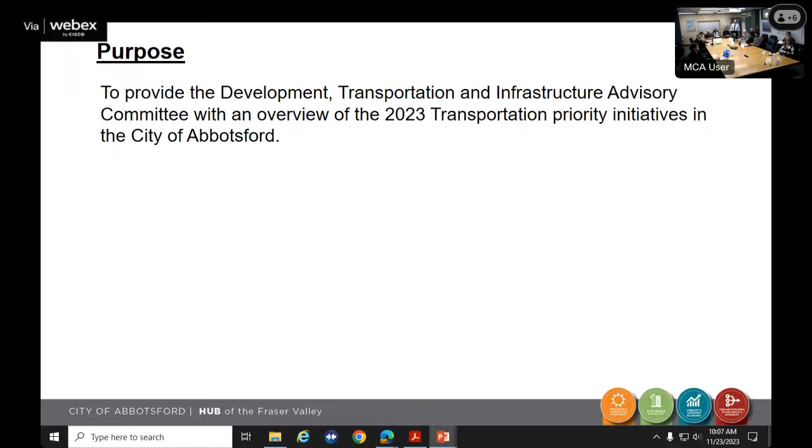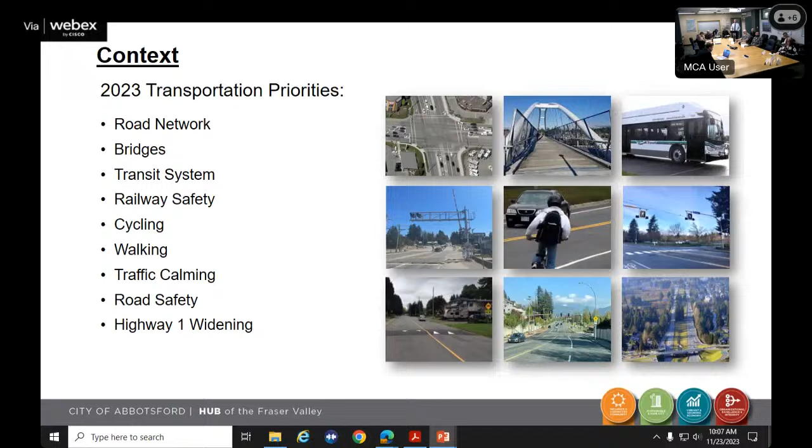So with that, our agenda will walk through these points, and the purpose is to provide the committee with an overview of the 2023 priority initiatives for the city. We are going to get into these 9 topics: our road network, our bridges, our transit system, railway safety, cycling, walking, traffic calming, road safety, and the all-important Highway 1 widening that's coming.

So starting with our asphalt rehab program, it begins with road quality data collection. We have a vehicle that drives all of our roads and produces a worst to first condition rating of our roads. We then coordinate with our utilities department, our underground water, sewer, and drainage, and also our third-party utilities, Fortis and BC Hydro, to make sure we're coordinating the surface rehab with the underground works.

Sometimes the road quality has been reduced so much that the road must be resurfaced, so we coordinate underground works to happen first. Other times the road can be in okay shape, but an underground utility is at the end of its life and we have to do a project on it. So most of these are driven by that data collection on the worst to first list, but some are informed by the underground works that have to go first.

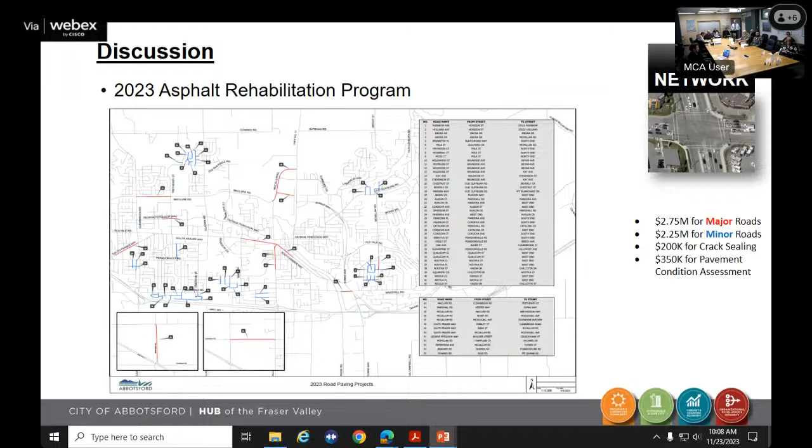Another example of a road in town that I feel is noteworthy for this committee is the Marshall Road corridor project between McMillan and Timberlane. It's an example of an urban road that was being underutilized and not meeting the demand or the need of the residents that travel it. It was only serving really vehicles for travel and parking.

This is just a snippet of one component of the project at an intersection where you can get an understanding of what a complete street really means. It's an insight into future work where Marshall Road was quite wide and we had a lot of need to serve cyclists, pedestrians, transit, parking, and travel. Where it was only really serving 2 of those, we now have an ability to put in improved infrastructure that serves 5 different modes on that same road right-of-way. That's an example of work that's underway right now.

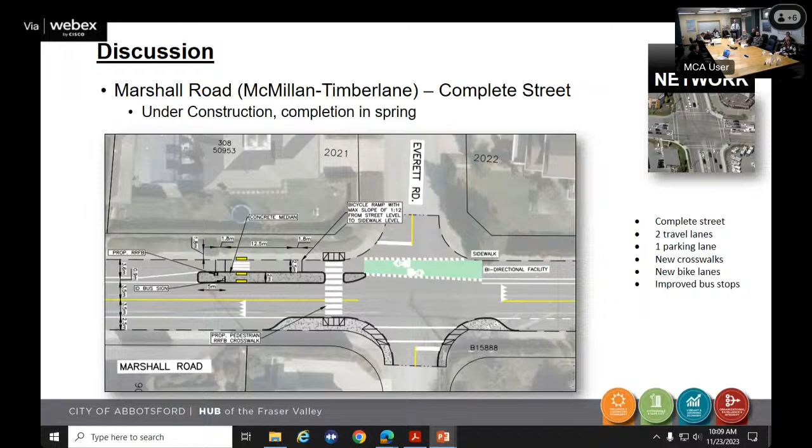Construction is about to begin here at this intersection. There'll be some significant earthworks and retaining wall geotechnical work done here to provide the footprint for this new intersection, which will have left turn lanes, improved lighting, new crosswalks, and it will help with the flow, efficiency, and safety at this intersection.

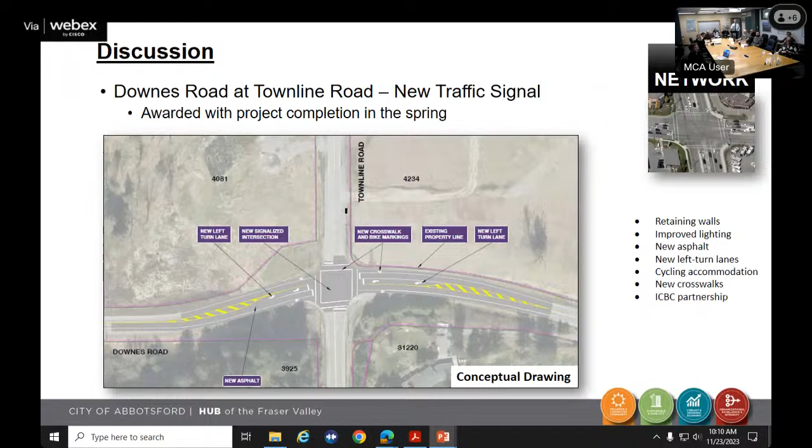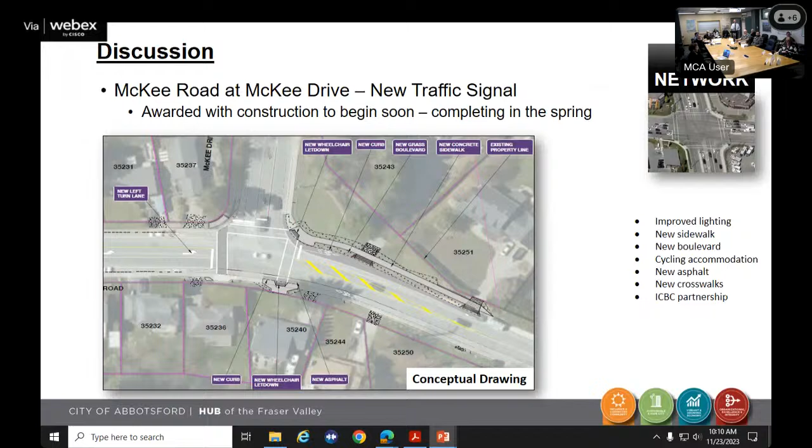Similarly, work is underway at the moment at McKee and McKee, with improved lighting, new sidewalk, boulevard, cycling accommodation, crosswalks, sidewalks, boulevards, all of our current engineering standards going on to help with the flow there.

And tendering this month is an emergency signal for our fire hall number 1. So when a call for service happens and our crews jump into whichever vehicle apparatus they need, we'll stop traffic on the 4-lane arterial road of George Ferguson while they leave, which will help improve their response time and safety.

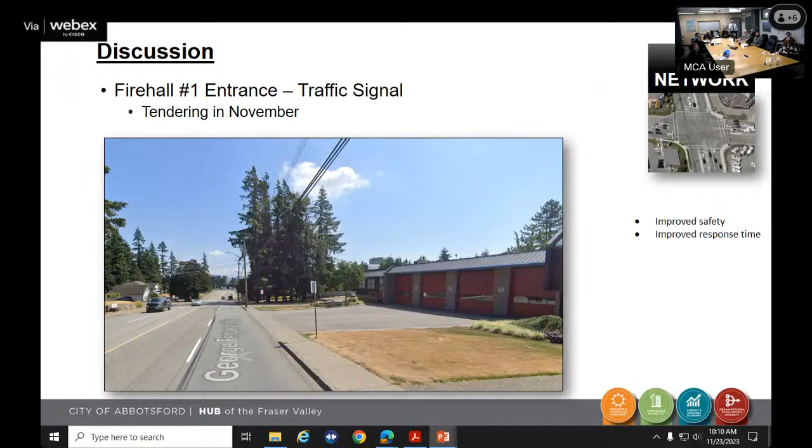Some existing signals that we are upgrading over on Townline at Firhill and Ridgeview. It's underway right now. We are better aligning this intersection.

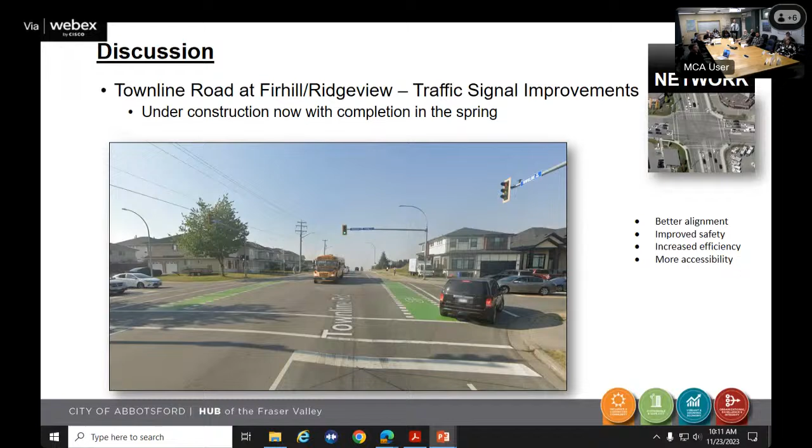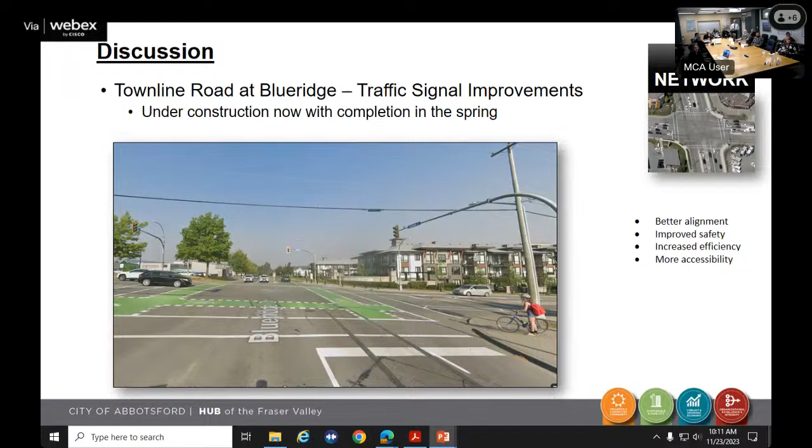We have added dedicated left turn lanes and matching the signal to that, improving the lighting and making accessibility better. Same over on the same road, just further up at Blueridge. Just giving you a snapshot there. So this vehicle happens to be positioned in the left turn lane, and the signal in the background doesn't have the advanced green arrow.

So we are adding that, and that just helps with the flow, efficiency, and safety at that intersection. I'm not sure how many people have been out on the Fraser Highway lately, but you'll see that we are essentially substantially complete. There's a little bit of cleanup work still to remain to be done, but we have expanded capacity. We've added, as this picture indicates, some improved bike lanes, some improved turn capacity for right turns and left turns. This is at Ross. Every intersection is slightly different to meet its needs. This is phase 1 of future phases that will continue this, but for right now we have improved the capacity, efficiency, and lighting of the corridor.

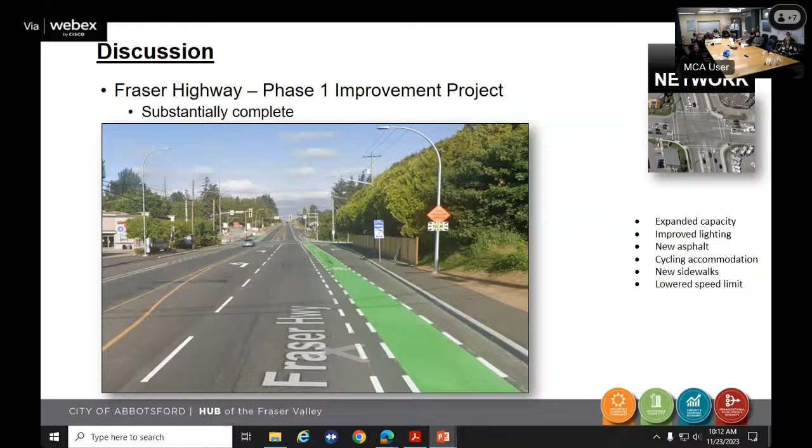Marshall Road will be opening at the end of this year, very soon. This was important, I think everybody understood previously from this announced project the importance of it connecting to our industrial area to the 16th Avenue corridor. This is going to take pressure off of Fraser Highway, off of Highway 1. It's a very important connection, and it will be opening soon, and we're very fortunate that that's going to be the case.

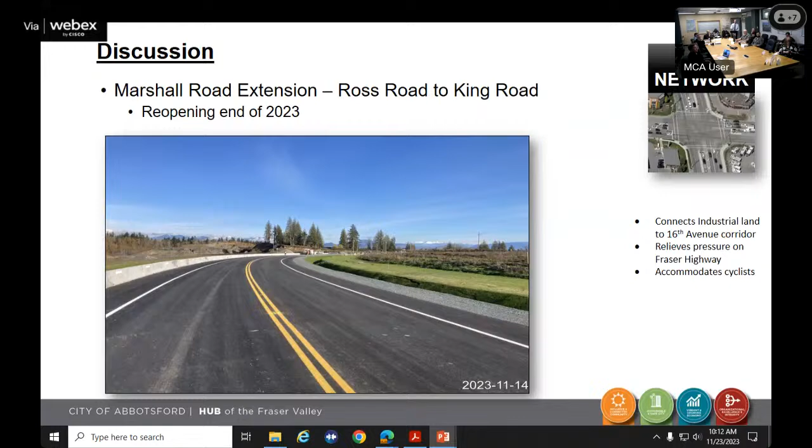Another one, everyone's aware of this. I won't get in front of our mayor and council announcing when this is opening. It's opening very soon. This one is connected to the Nexus Lane and the Highway 1 border crossing project that we partnered with the Ministry of Transportation and the railway companies on. Grade separation is the key here on this overpass. In the distance, you see the roundabout at Riverside. It accommodates pedestrians and cyclists, and it is a much needed efficiency improvement in that area. I think everybody from the city understands that, so we're all looking forward to this opening up very, very soon.

Oh sorry, one last note, the last bullet there, it also serves for a bigger purpose of the extraordinary height and width loads that come through Abbotsford, passing through our community. Without this being open, the previous detour route was very awkward, so this makes a more efficient route for vehicles coming from the lower mainland that need to travel to points eastward and vice versa. This relieves them from having to detour way south to 4th Avenue, potentially get caught up in border issues, railway crossings, and is more streamlined. So the province, one of the reasons why they partnered with us on this one, was also to get an improved extraordinary load width route for them.

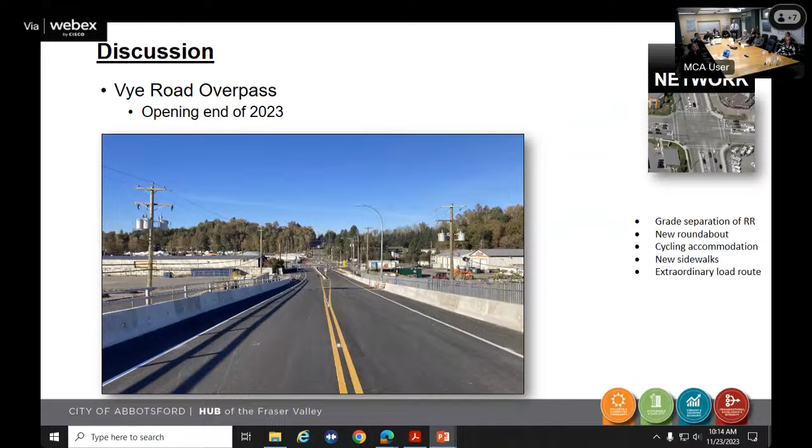Over to the bridge program. So we have 52 structures, bridges, in Abbotsford. They get inspected every 3 years. They have annual bridge maintenance on them. Sometimes there's larger issues at play, so we have an annual bridge betterment program that addresses those. That can include replacements of end-of-life structures.

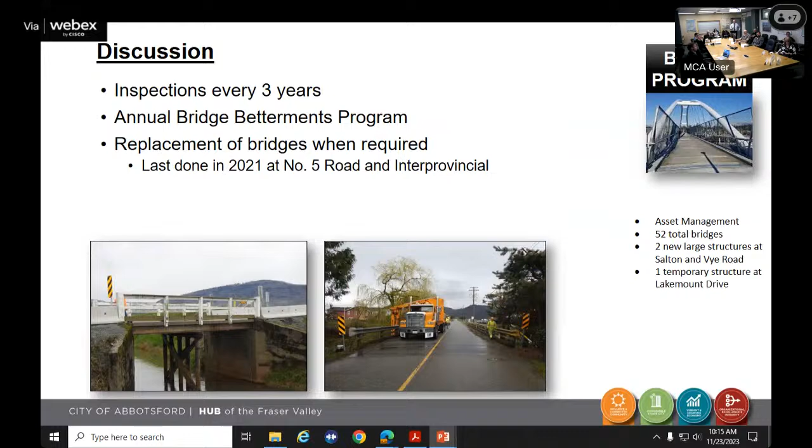Our last one was just done in 2021 at the floods out in Sumas Prairie. And yeah, our structures now, as we grow as a city, used to be more representative in the picture in the bottom left there, but we are now starting to get the larger structures that a bigger city gets, like Salton Road for the pedestrian or the new Vye Road. So we are growing there.

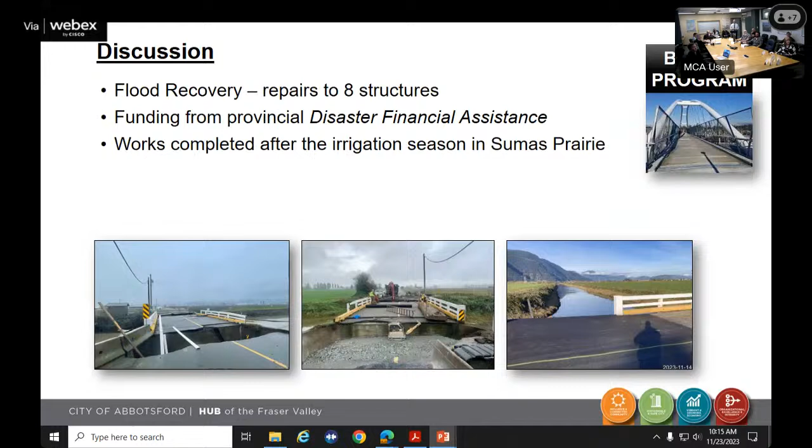Just a note too, though, about the flood recovery. In my capacity in the last couple of years, I've been helping out in this area. So the bridge program that would normally be done by transportation, some of the structures were damaged and have been repaired by the flood recovery through the province. So getting some provincial financial aid for them, and just a couple of representative photos of Number 4 Road as an example.

One bridge, I'm not sure if people have been out to Barrowtown lately, but the old Highway 1 bridge, just south of Barrowtown, came to the end of its life. It was devolved to us from the province, with some funding for removal. So the old bridge had, I don't want to be wrong here, I think about 90 of those creosote soaked wood pilings. So not just environmentally improved now, but that old structure was at the end of its life, and that has recently been removed.

Some final remediation works are to take place there in the bottom right, but you could sort of see before, during, and after there.

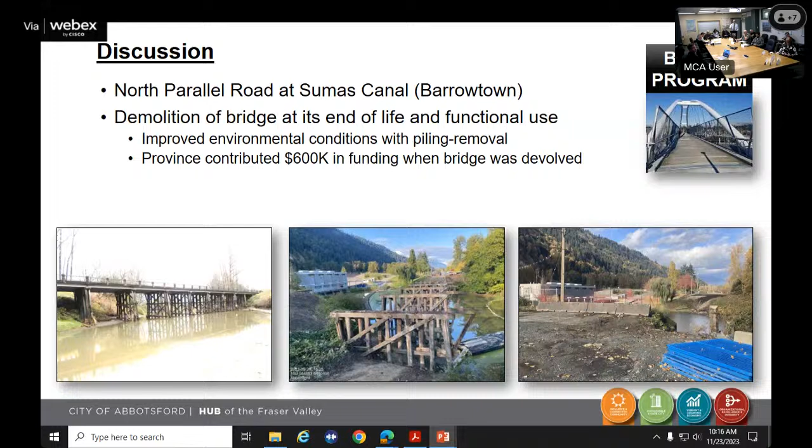And that sort of concludes the bridge part. So over to transit. This year, predominantly, I'll remember it for two things.

One was the 5-month strike from the operating company with their unionized workers. They resolved it, which is nice. The second thing I'll remember this year with Transit is that we've hit an all-time high in Abbotsford.

Our transit ridership has never been higher. We were previously proud to report back in 2019 our highest ever, and then the COVID years happened where everything changed in transportation. People were working from home, nobody wanted to be out in public. Our transit ridership dropped by 80% from what was our previous high, and the big question was, would it ever come back? Were we ever going to see high ridership on public transportation again?

And we have just absolutely punched through that thinking into 122% of what our previous high was. So that really tells us a few things, that we are starting to grow as a city, grow in our urban areas, on our frequent transit network, starting to see capacity bus routes. So now it's on us with our planners at BC Transit to really target expansions for the future in the right way, aligning those expansions with development.

So we have presented previously to council our expansion plans for the future. It's going to start with actually a HandyDART expansion next year.

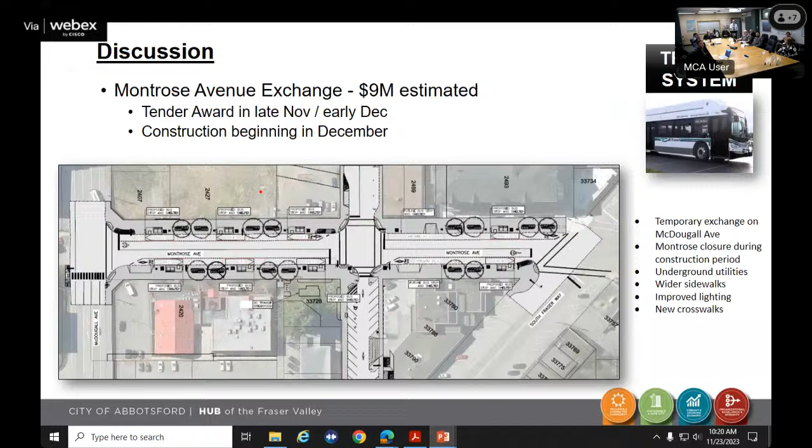And we have CN that runs along west or east to west along the banks of the Fraser and heads into the city that way. So those CN and CP are federally regulated, and all railways fall under the sort of safety and regulation set forth by Transport Canada.

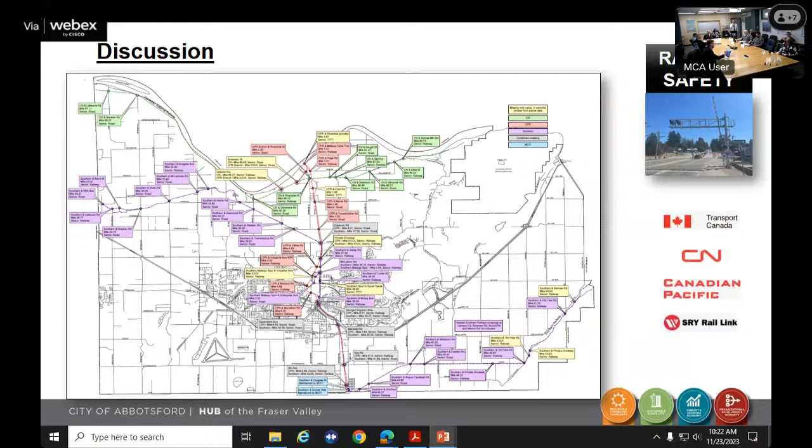So there's engineering work. Each one of those boxes is representative of staff here from the City of Abbotsford working with the rail companies under Transport Canada at each one of those bullet points. The things you see there, the signage, the road markings, sometimes gate arms, that's all representative of railway safety work that we do here.

Sorry, go ahead. There's one missing. On page 23, it would be just west of Bowman Road. There is another private driveway. Private driveways - if we want to get into the weeds, I love that you went into the weeds - there's actually a few more private driveways that, believe it or not, made the slide almost unreadable. Some of the private drives actually aren't on there, and I'm thinking one's closer to Majuba Hill. Yeah, there's a couple on here. So how do some make the cut and some don't?

This is an internal sort of document that could have been identified either by us or by the railway companies. It wasn't supposed to be an exhaustive list, but it's supposed to be representative. I did note a couple that I'm aware of on Majuba Hill, and it's quite possible there's a couple that aren't shown on there as well. I bet if we looked closer out in the Matsqui Prairie, on roads near Bell and Beharrell and such, there's a few more farmer crossings out there that haven't been identified. It wasn't meant to show everyone, but these show the level of work that's been done by our staff this year.

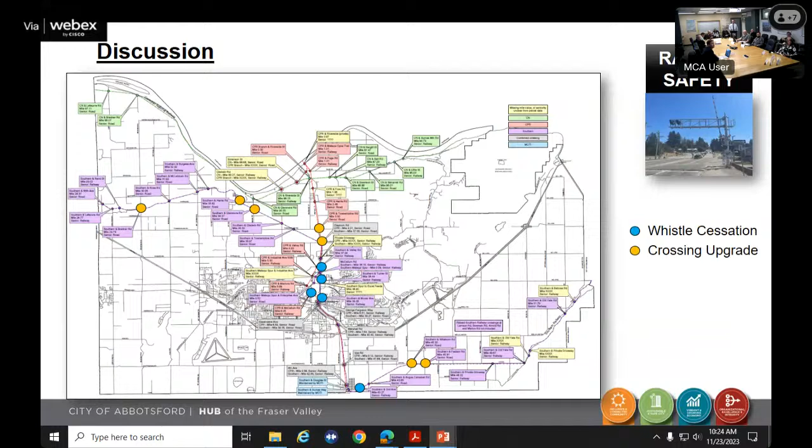Thank you. No worries.

Over on the cycling program, one that we're currently working on that we've got a tender coming for early next year is Sumas to Delair. I've just taken this snippet to give a representative look at what it is. It's defined as a bikeway, but it does more than that, and many of our projects are like that. It's given a title, but what we actually do is, in this case, certainly construct a bike lane, but its connectivity with the adjacent road network means we're changing alignment of roads, adding boulevards, lighting, crosswalks, and driveway connections. So there's more going on than just a cycling program, but the ultimate end product will be cycling infrastructure connecting Highway 11, or Sumas Way as we know it, over to Delair Park at Yale Road.

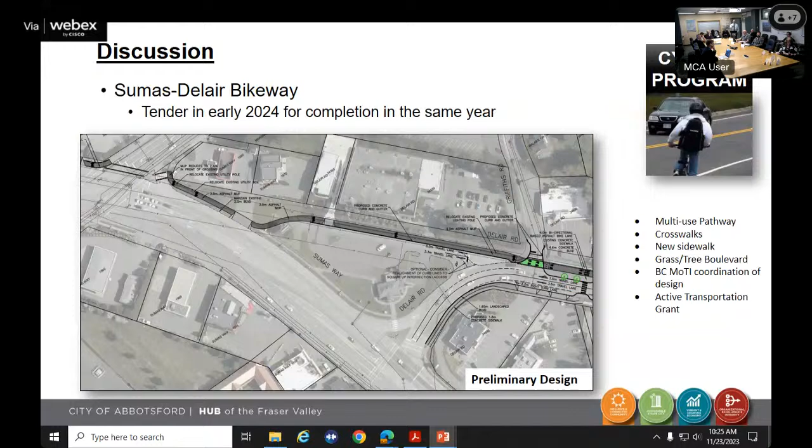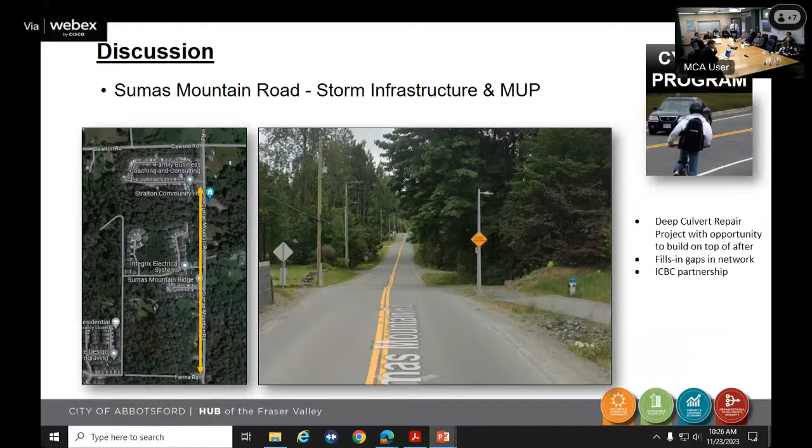In town, we have a sidewalk connection where development left off, and there is a gap between that development down to Marshall, which connects down towards the hospital and fills in a gap in an urban area.

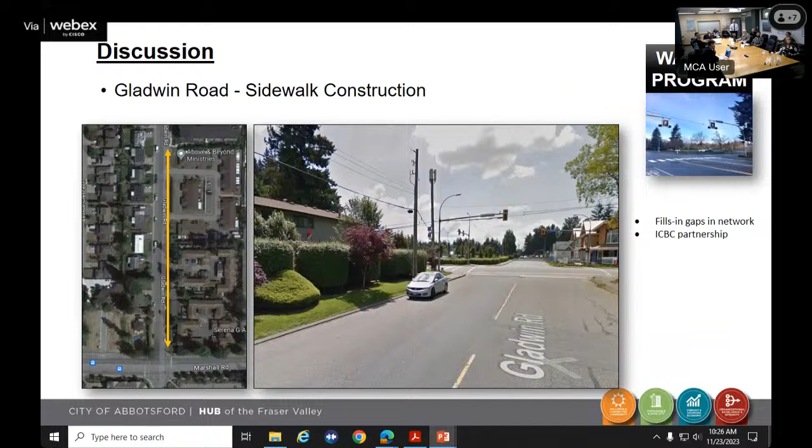And that's where we are.

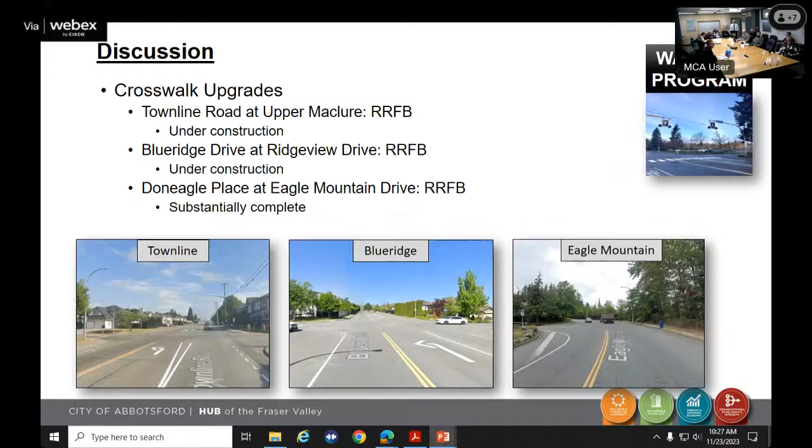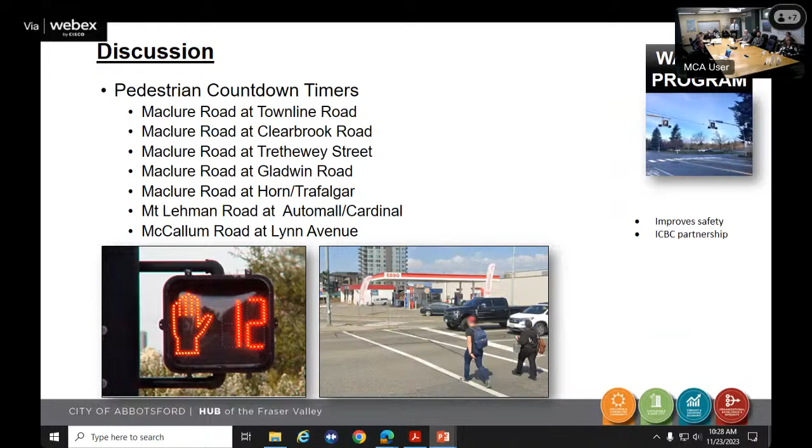You'll see just by the nature of the roads we're targeting, we're going for urban arterial roads, and we do this every year, usually anywhere from 6 to 8 a year.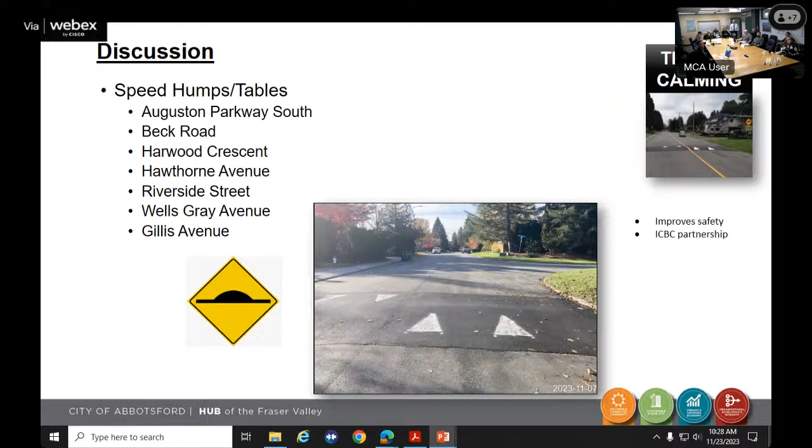We're spending more time here. I believe there had been a delegation to this committee in the past about issues along Maclure. We have been doing asphalt rehab programs and, at various points along Maclure, we've reduced the speed. We are spending time and effort on Maclure, and we will continue to do so because we know how important that road is in our community. So this is just one more component of Maclure that we're working on.

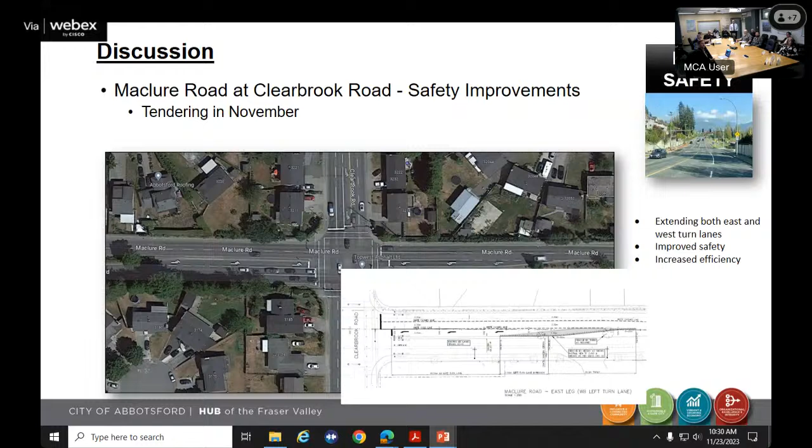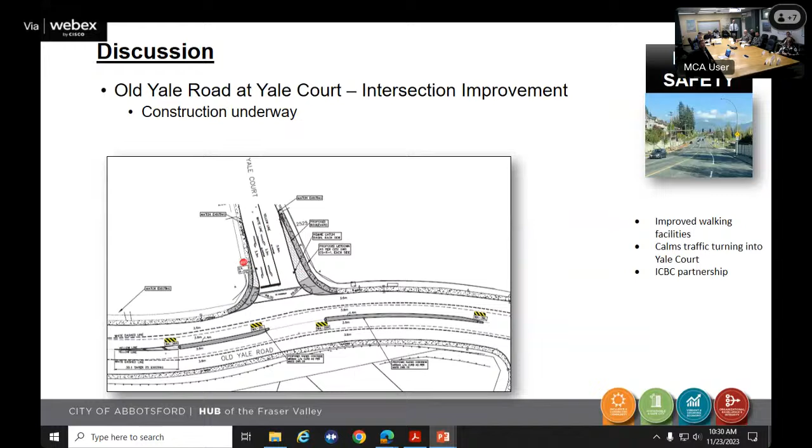Another road safety project, I believe it came to the TAC committee, the precursor to this committee, was issues at this intersection. So this is us getting to the construction of it, to help safety at this intersection. The speeding was the central issue along Old Yale Road, and that made it difficult turning in and out of Yale Court at Old Yale Road. So we have taken the opportunity to also address some walking challenges there as well.

One more component of road safety is power outages. We have something called UPS, uninterruptible power supply. Essentially, when we have a power failure, the traffic signals will continue without interruption, they have battery packs and will continue for, depending on the type of signal and how much is going on and how much battery power is needed, 5 to 12 hours of battery life. That usually gives the power company enough time to restore power without the traffic lights also being dark.

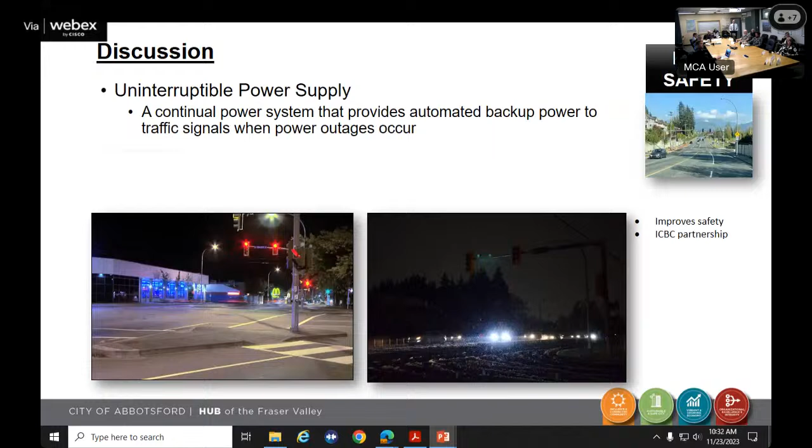The four-way stop procedure is the ultimate end result if even the uninterruptible power supply, after 12 hours at an urban intersection, becomes a challenge for the battery packs to keep going. The picture on the right is what you get, and that's a challenge. So we are trying to back up our signals with battery packs, and we do that every year as well.

We tried a very brilliant yellow neon school stencil across the road. ICBC was generous and paid for the product, and we just covered our time for traffic control and putting it down. We are going to monitor its effectiveness and how durable it is. Can it handle winter operations? Does it still look okay after a year or two? Then we'll decide where it goes from there, and we want to hear from the schools as well, whether they felt it did its intended job or not. So we just tried 2 rural elementary schools, and we'll see from where it goes from here.

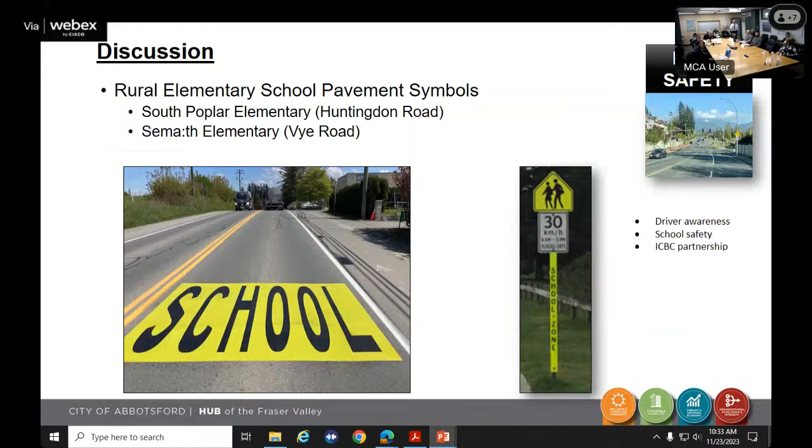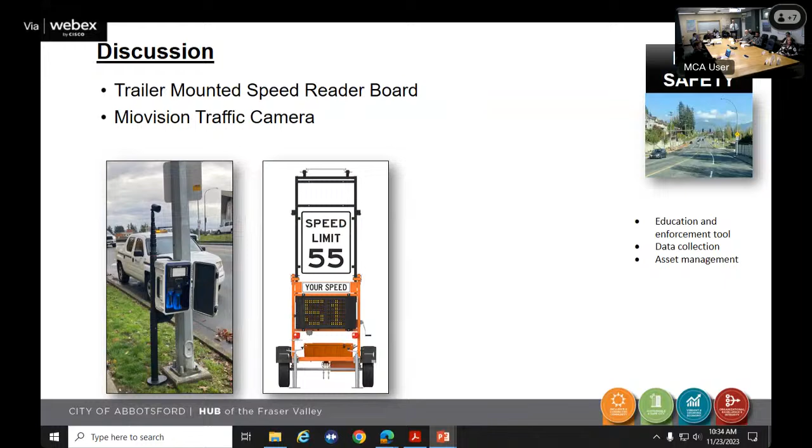And the other one is for our work with the Abbotsford Police Department. We have a mobile speed trailer that members will be able to hook up to their vehicles and take out to a scene in a neighborhood where we've had issues. So it just allows us to be a little more reactive and responsive to the public that asks for help, and we don't have a fast way to respond with like a major program. We can just go out right away with one of these units.

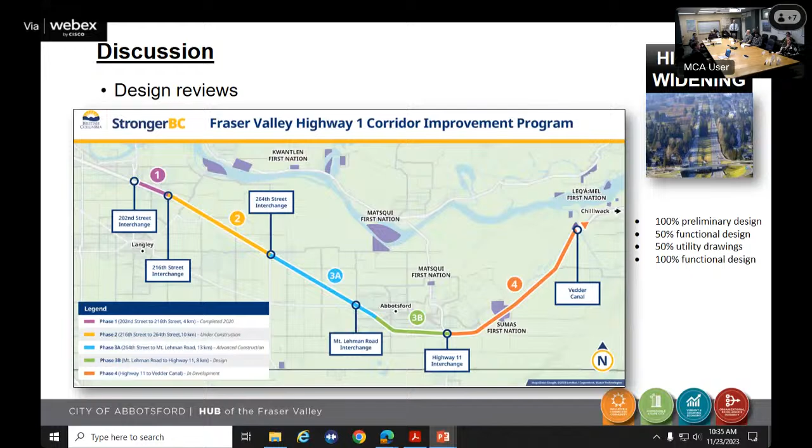We're just saying that, as an example, the last drawing review, they gave us 409 pages of designs for that. So it's representative of the time and level of effort to build what is going to be a very expensive project through our city, very important to our city too. So there's a level of effort there.

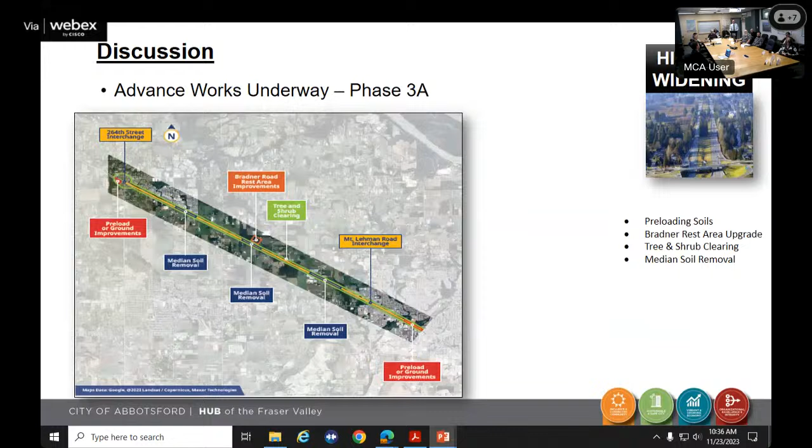So with that, there are some advanced works that are actually underway. We've got on this slide, it shows that there's a lot of soils in the median that are being removed, and preloading of soils that are going to go underway. They've got tree and shrub clearing and removal, and these works are underway. Contracts have been awarded. I've been at 3 different pre-cons for 3 different segments of the highway with contractors. So they know how they're going to get in and get out, and it's going to take them a good year to get in. And there's a lot of material in the median there to be removed and preloaded.

I hope that pacing was okay. That's a lot, you know, and I do want to be clear, these were tangible projects that if you drive around the community, you can see. It wasn't meant to be a rundown of everything that we do as staff.

For the development community, you should know that every development that comes through our city, be it a 2-lot split to a big development, is reviewed by staff, and every special event - every parade, Christmas lighting, Remembrance Day, Canada Day, Sikh Parade - that all takes staff time to work with the organizers and the police on those types of works. There's every permit, every contractor that goes out to work on the roadway, our staff make sure those traffic controls are safe and proper. So it wasn't meant to be a rundown of everything we do.

We do a lot of planning work as well too on future areas. I know reports have been brought to this committee before for the McKee Peak and other planning areas, so a lot of staff time is also spent on that as well. But we thought there was a bit of a gap that we wanted to address to this committee for that actual work that you would see as you drive around the community. And we were hoping this presentation would sort of give a rundown of what you're seeing in your own city. But I'm here for any further questions.

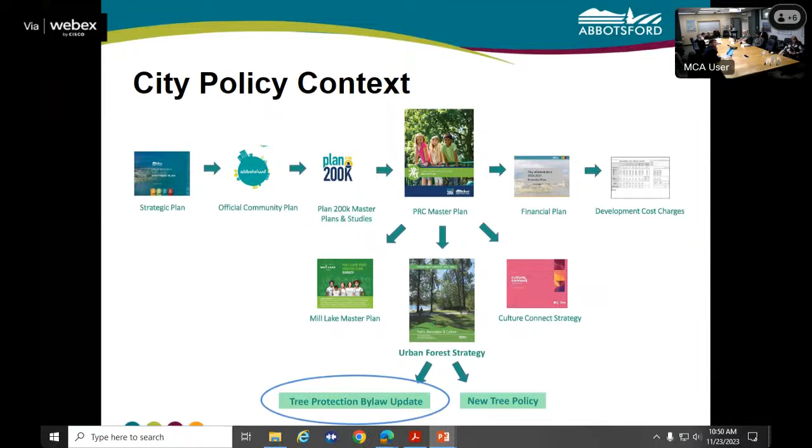As was also mentioned, the tree bylaw responds to a lot of actions from the strategy that I'll provide more information on. Alongside that, there are plans to create a new city tree policy focused on city management of trees that will be coming later. The Urban Forest Strategy was adopted in 2022 and provides a lot of direction specific to updates related to the tree protection bylaw. Also worth noting, Abbotsford's current bylaw is somewhat dated, adopted in 2010, and at this stage the city judges that it lacks the outlook necessary to effectively manage the urban forest.

Now, when it comes to tree regulations, tree protection or tree management bylaws are always the first thing that come to mind, and certainly they are an important tool for how we manage our trees. But before we dig into that, I wanted to spend a moment acknowledging how it fits into the broader spectrum of tools and regulations that have an impact on trees in the city.

There are really three categories we like to speak to when it comes to tree management. The first is higher level tools such as your Official Community Plan and the Urban Forest Strategy, which are there to set direction and policies that guide the intent behind how we manage the urban forest. Another important set of tools relates to land use.

Zoning bylaws will take precedent over a tree bylaw to ensure that people are allowed to build to permitted use. Therefore, what zoning allows in terms of site coverage, for example, will have big impacts on how many trees we are able to retain and or plant in the future. That's also an important consideration when the city thinks about how trees are managed as a whole.

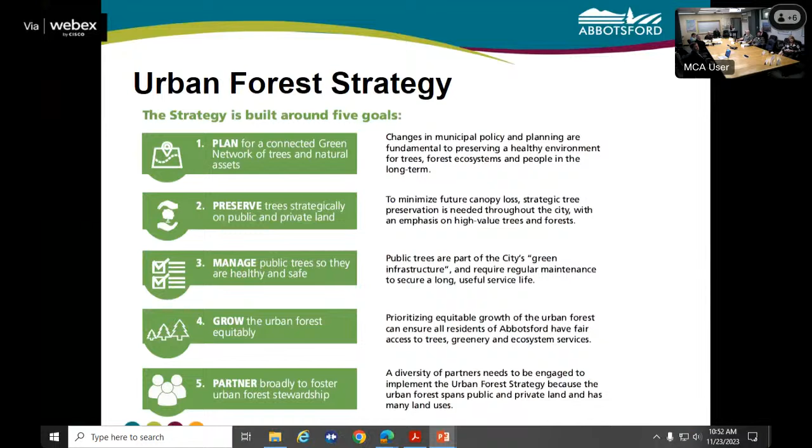Without going into too many details, I wanted to acknowledge that as part of those higher level guidance documents, the Urban Forest Strategy is built around five broad goals under which a number of actions sit. As a whole, that document includes 55 action items, of which we have six that are directly or indirectly related to some of the options we'll be discussing today.

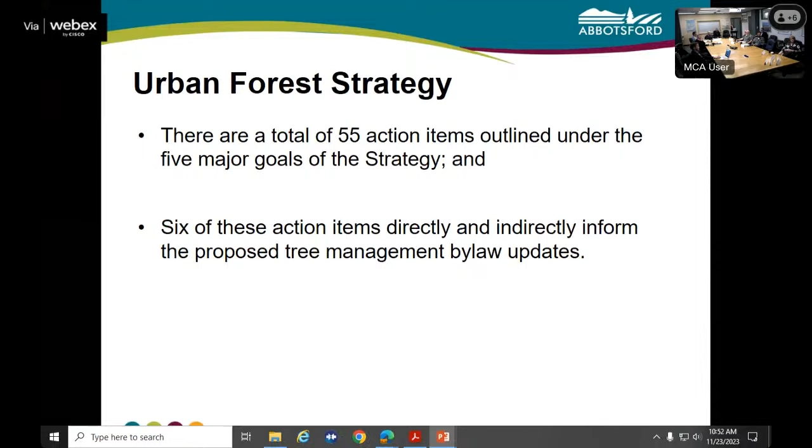So when it comes to tree-specific guidance within the strategy, there are a few actions you'll see here. Action 4 is focused on updating the recommended tree species list, with a few things in mind, including making sure the species we're planting will be suitable in our changing climate. Action 10 is focused on updating the tree bylaw to align it with the strategy's targets to strengthen tree protection and replacement, including within those development permit areas, and I'll be getting back to that.

The third action you see here is focused on creating a nomination process for significant trees, which would serve to populate what is now an empty schedule within the tree bylaw.

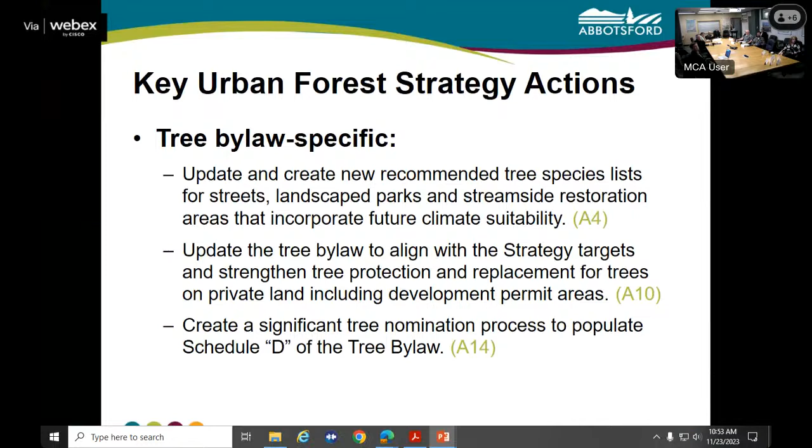More generally relevant, of course, is the tree canopy cover target included in the plan, which is 40% citywide, with no neighborhoods less than 20% in canopy cover over time. There's also an action focused on increasing tree cover in neighborhoods that have fewer trees, so less than 20% canopy.

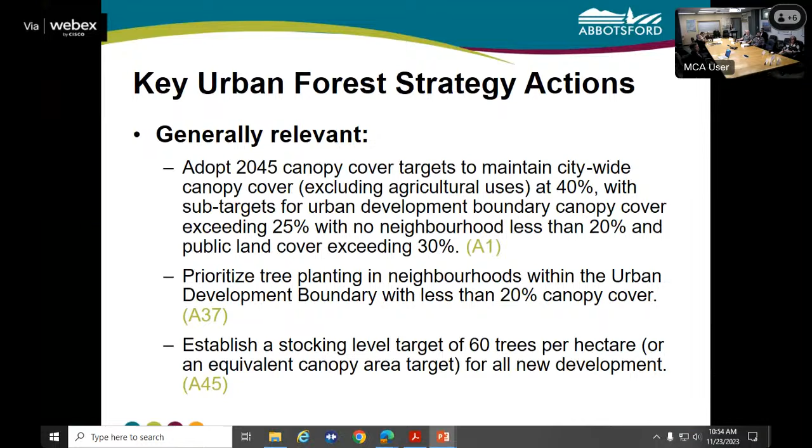This is an angle that's important for us to consider when we're looking at updating your tree bylaw. The last one I'll mention is a recommendation to establish a stocking level target, or tree density target, of 60 trees per hectare for all new developments. This is also connected to that 40% canopy cover target I just mentioned, with essentially the intent to equalize canopy cover, increasing it in neighborhoods that have less canopy over time through development.

More specifically though, what does 40% canopy look like?

The reason why I'm mentioning those two numbers, 40% canopy as a citywide goal and 60 trees per hectare for new development, is because they're fairly closely related. When planting trees that will grow a medium to large canopy at maturity, we estimate it would take about 60 trees per hectare to achieve 40% once those trees have matured. So if we are aiming for 60 trees per hectare on new development, that would allow us to achieve that target over time.

It's worth noting that this would require more trees if we're planting smaller species such as cherry trees. But generally speaking, that's why you're seeing those two numbers, which I'll be referring to a few times through the presentation.

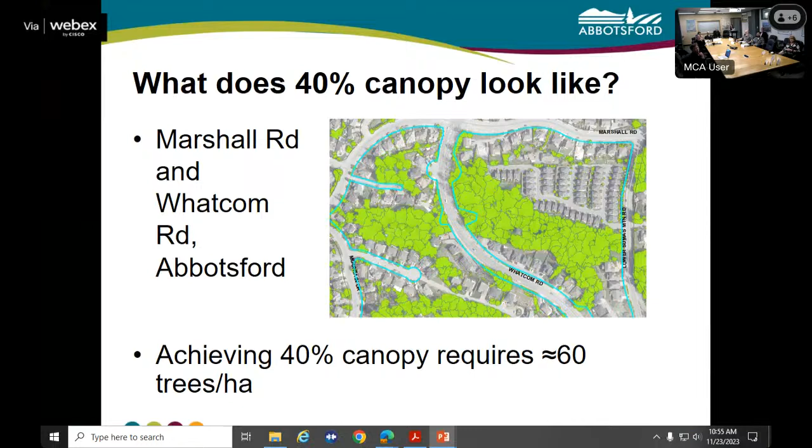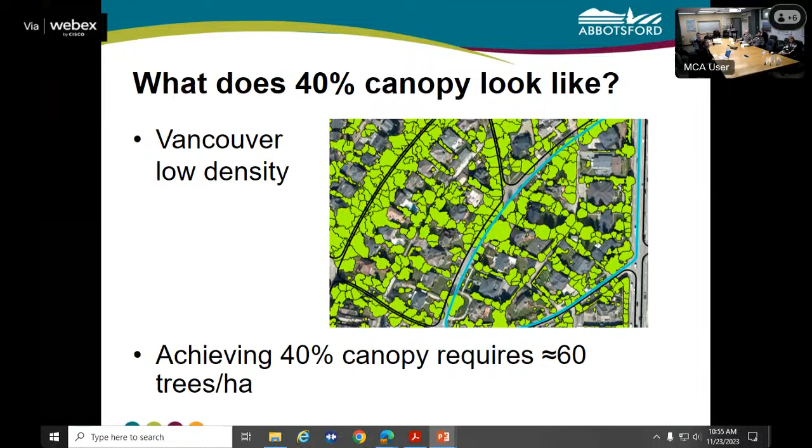And then a lower density example where we have trees that are a bit more spread out across some of the larger yards. So there are a lot of places across our region where we can see different ways to achieve a target such as this one.

Now getting back to what you have in place right now, Abbotsford's current tree protection bylaw applies to all land except lands within the agricultural land reserve and some privately managed forests regulated by the province. On all lands where it applies, it regulates any trees greater than 20 centimeters in diameter. At this time, in the way the bylaw is worded, there is little criteria related to how the city might refuse removal of those trees, with more focus on ensuring replacements are planted.

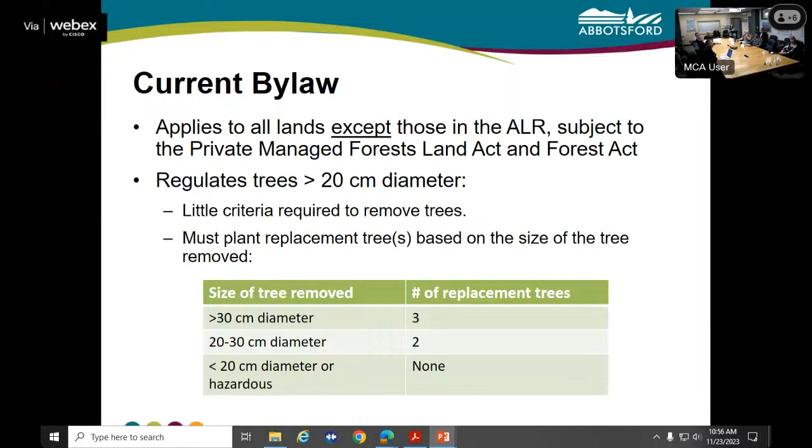You'll see in the table here that the larger the tree removed, the more replacement trees would be required to be planted. There's also another category of trees within the bylaw, called trees found within retention areas.

So-called retention areas would include a few things listed here: one, significant trees, which would need to be individually listed in a schedule that contains, at this time, no trees. Also trees within your stream protection and enhancement area, trees in protection covenants, and trees identified as such on development drawings.

For those trees within retention areas, the city can refuse removal if it is not necessary for tree health, for safety, or to achieve permitted use. And in cases where those trees would have to come out, the same replacement requirements would apply that I showed you on the previous slide.

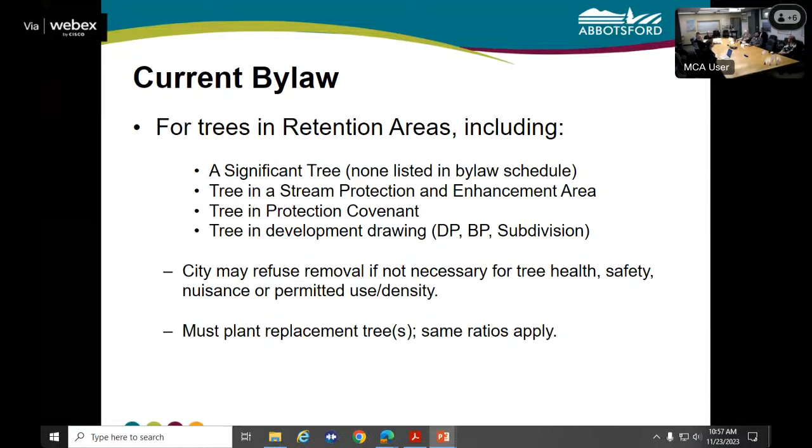So that's just a reminder for everyone of what is regulated in Abbotsford right now, in very brief terms. Now, as was mentioned, we are at the stage of exploring some options for updates. That's what I'll be running you through for the remainder of my presentation, and hopefully we'll hear some of your thoughts on that afterwards.

There are two categories of changes that we are looking at. The first one, which I'll spend less time on, we refer to as administrative or best practice updates. This is really focused on making sure that while we update this bylaw, we make it as clear as possible, consistent, and conform, and that we align it with up-to-date best practices.

We know the bylaw was adopted in 2010, so we want to make sure we are responding to current arboricultural best practices. The other set of changes, where I'll spend more time, is what we call major influence changes - those that would, if implemented, mean more fundamental changes in the approach of this regulation in terms of how we are retaining, removing, protecting, or replacing trees.

So I'll give you an overview of those administrative updates, just so you have a sense of what they include, and then I'll spend a bit more time on those major influence options that we are considering.

In terms of administration, one item is looking at the permit information requirements to make sure we can provide standardized and clear information on what is expected, both for external professionals such as arborists and for city staff, to hopefully standardize and make reviews more efficient and ensure applications conform with the bylaw requirements.

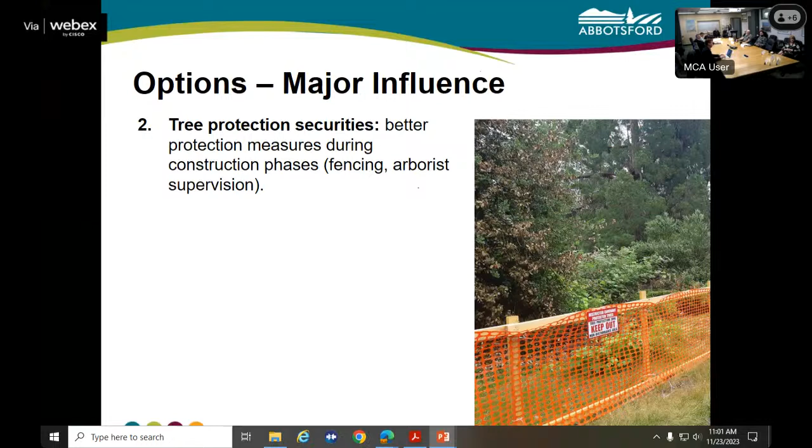The second option we are looking at is tree protection securities, which are refundable securities that could be provided at the start of a project and refunded at the end of a project once the city receives confirmation that appropriate protection measures were taken throughout the project. These are fairly common in a lot of bylaws. Typically, they would involve receiving an arborist memo to confirm that barriers have been installed and that supervision took place according to bylaw standards once the project completes. So again, that would include new securities that would be taken and refunded at the end of a project.

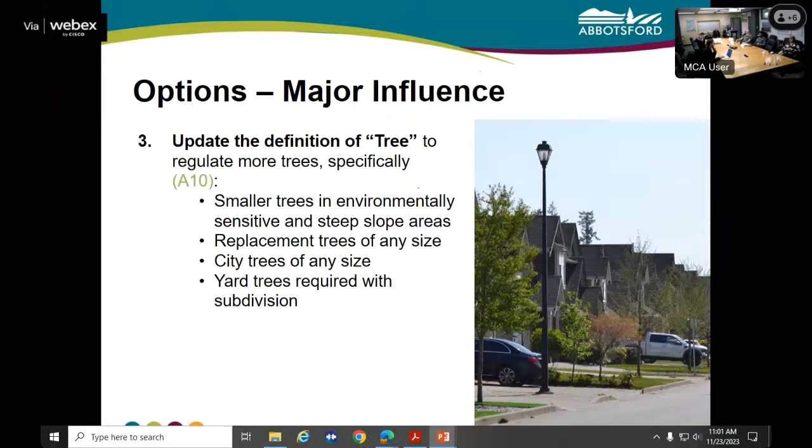The other thing we are looking at is revising the definition of trees regulated under this bylaw. You'll recall those are trees greater than 20 centimeters in diameter or within retention areas. A few updates we are considering include smaller trees within environmentally sensitive areas and steep slopes, simply to align with guidelines within those development permit areas. We're also looking at including replacement trees planted as a condition of the bylaw, city trees of any size, and yard trees required as a condition of subdivision. So the intent essentially would be for those trees to become regulated at a smaller size than 20 centimeters.

Another option we are looking at is related to replacement ratios. You may recall replacement ratios mean you need more replacement trees the larger the tree you remove. A couple things we are looking at, in terms of options, would be to add a category for even larger trees being removed to increase that ratio, meaning more replacement trees needing to be planted to compensate for those very large trees removed. We're also adding a smaller replacement ratio of 1 tree for every tree removed for those smaller trees I mentioned that we might be adding into the bylaw, recognizing that smaller sized trees would require fewer trees to compensate if removed. A few other options we are looking at would be to lower replacement ratios if the trees planted are of species that grow to a large size at maturity, or allowing saplings and seedlings when replacement takes place within natural areas or on steep slopes. Again, all of this is about consulting on how many trees we require based on the size of the tree removed.

The fifth option we are considering is specific to city-owned trees being removed, and it is to update the value captured when those trees need to be removed for a private project, to ensure it covers the cost of purchasing, planting, and maintaining that tree, as well as the amenity value of the tree, which is based on a standard industry method. Essentially, the idea is that the value compensated would be proportional to the value of the tree. For a very small tree versus a large, mature, good condition tree, the value captured would be higher to compensate for the loss of those benefits, which we are considering capping to ensure it remains within a reasonable range.

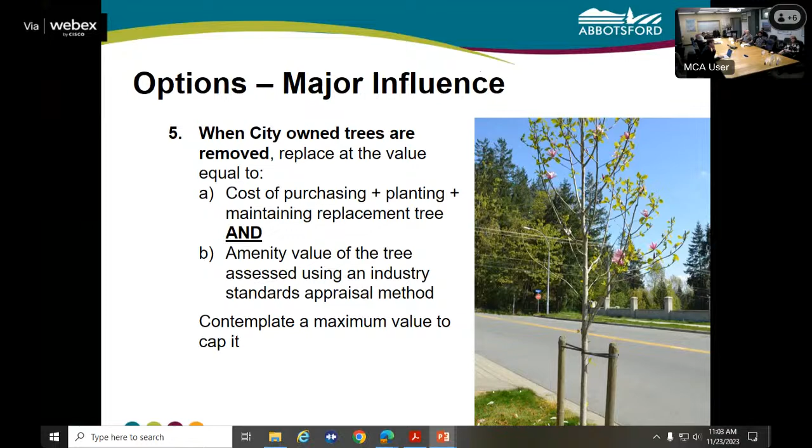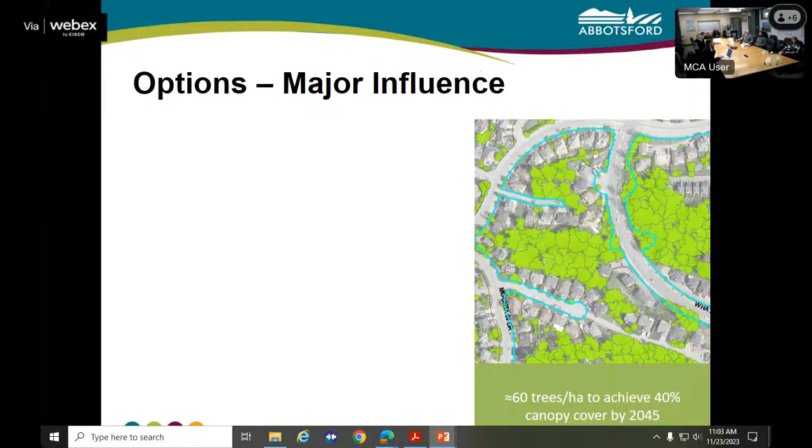Okay, now we're back on that 60 trees per hectare I was mentioning earlier. There's a few ways we are considering using a tree density target like this one to update the bylaw. There are 3 items here, and I'll take you through them one at a time.

One way a tree density target can be used is to cap replacement requirements. This would be particularly relevant for very forested properties undergoing development. When going from a use that is essentially forest to, for example, housing, those replacement ratios become very high in total value. To recognize that we are transitioning a use, often because there isn't space to provide those trees, using a tree density would place a maximum on the number of trees considered for replacement on that property.

If we use that 60 trees per hectare, that would presumably allow us to achieve the 40% target that is within the strategy.

Another way this could be used, linking back to an action mentioned earlier, is to require a minimum number of trees on new developments. The intent here is not only building a bylaw requiring trees to be planted on properties that already had trees, but also requiring properties with very little trees to participate in reforesting or maintaining canopy cover over time. Combining those two approaches, we'd have a cap on replacement for very forested properties, acknowledging they can't replace all the trees, while other properties without many trees would still need to contribute to some extent.

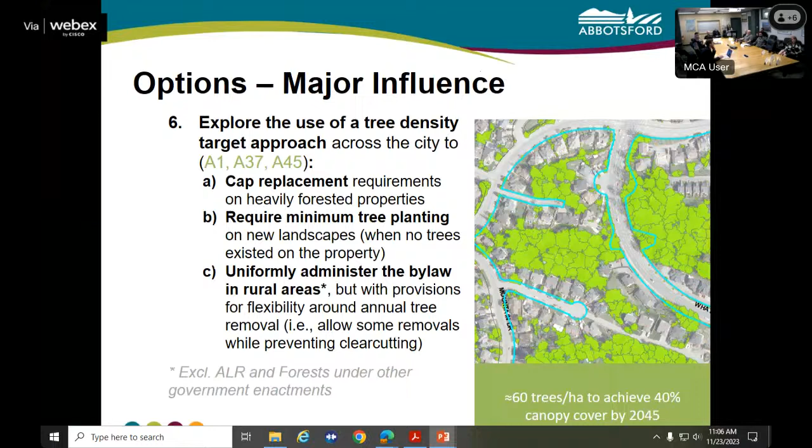So those are three pieces we are considering to try and align the approach of this bylaw with the canopy cover target.

The last option I'll mention, which brings us close to the end of this presentation, is looking at incentives for tree retention. We know trees take time to grow, so one option we're considering is providing tree replacement credits when good quality trees are maintained on site. Retaining already-mature trees means keeping those benefits and saving decades of tree growth, which is something the city is interested in.

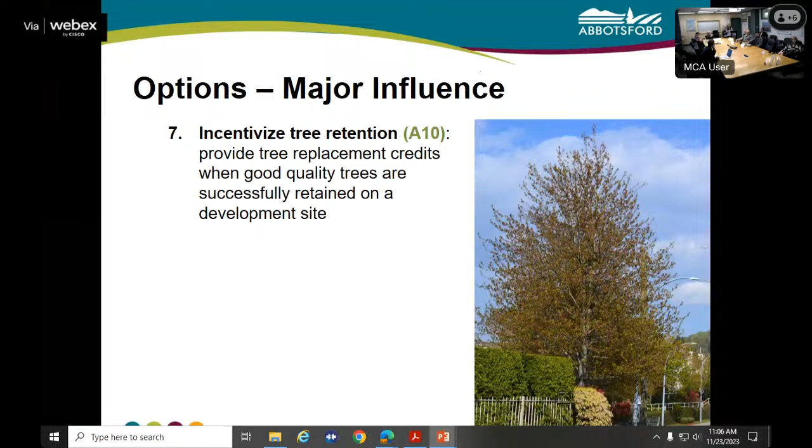So with that, I'll close with a reminder on our next steps. As mentioned, we are in phase 2, exploring options. We want to take more refined options back to council, and there will also be community consultation on the options we want to move forward before we get into bylaw drafting. With that, we'd love to hear questions and comments on any of this material.

Thank you, well done in such a short period of time. Got a lot of information in there. So, ladies and gentlemen, the floor is open.

Kevin asked for the definition of DBH. Yes, diameter at breast height. Thank you for raising that — it's jargon, essentially the technical detail of how you measure tree diameter. So it means diameter.

One other question: there's a fair bit of ALR land in the city of Abbotsford. What's the percentage of ALR versus non-ALR? 75 to 25. 75% ALR? Yeah.

And is there bylaws within ALR for trees? Very few. I'm on an interagency committee discussing other ways to try to enhance tree and stream management on ALR lands, because there are very few laws or legislation that govern it presently, and the right to farm tends to trump most of those.